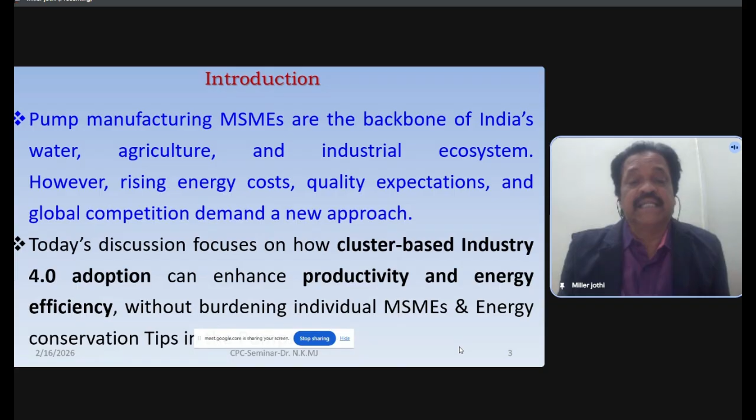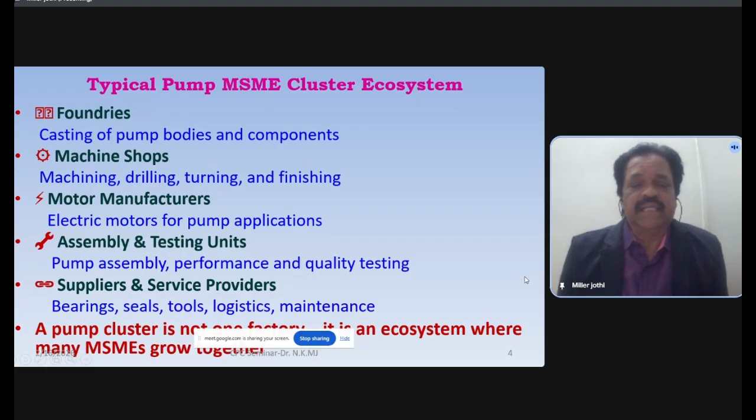So what is a typical pump MSME cluster ecosystem? It consists of five types of organizations: foundries, machine shops, motor manufacturers, assembly and testing units, and suppliers and service providers. These five units are considered as the cluster. A pump cluster is not one factory - it is many MSMEs growing together.

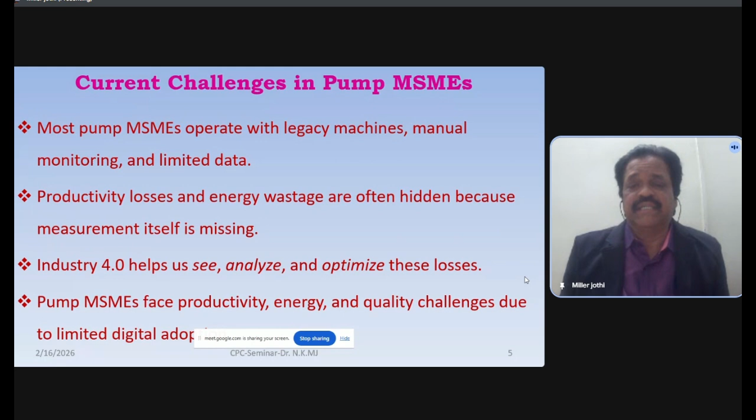What are the current challenges in pump MSMEs? Most MSMEs operate with conventional technology, manual monitoring, and limited data. Also, productivity losses occur with respect to energy wastage, often hidden because measurement itself is missing. So what is the solution? The solution is Industry 4.0 - it helps analyze and optimize these losses.

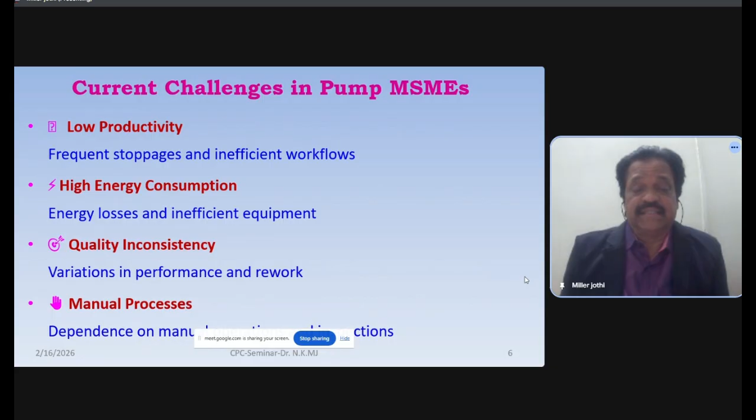What are the current challenges in pump MSMEs? Frequent stoppages and inefficient workflow lead to low productivity. Energy losses and inefficient equipment consume more energy. Quality inconsistency due to manual processes - these are the current challenges in manufacturing pumps in MSMEs.

So how do you overcome these productivity losses in pump MSMEs? They arise from quality issues, a lot of downtime, and skill limitations.

Most of the productive losses in pump MSMEs are not due to lack of effort, but due to lack of data, planning, and skilled work.

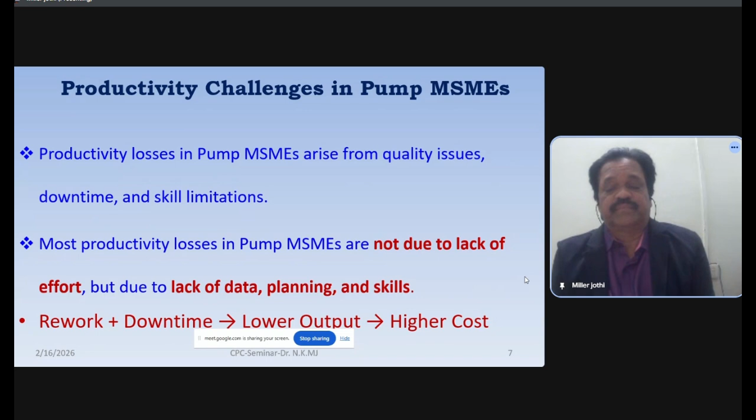What are the energy efficiency challenges in MSME during production of pumps? Energy losses in pump MSMEs occur due to inefficient equipment and lack of energy visibility. You cannot improve energy efficiency if energy is not measured. No measurement, definitely energy losses will be there, which leads to higher cost.

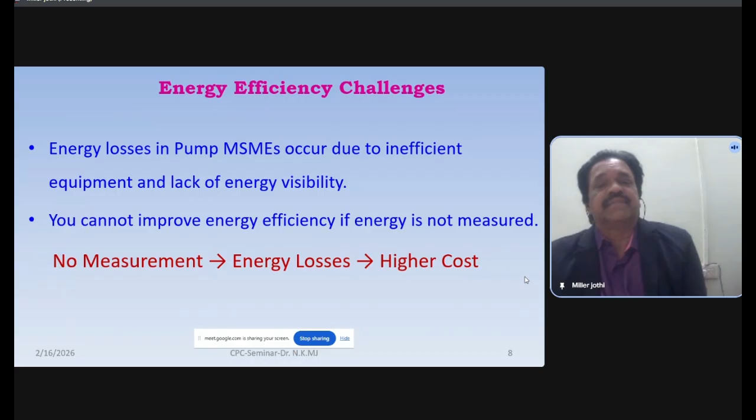So what are the current energy efficiency challenges in manufacturing in pump and MSME? High energy consumption and frequent losses by using inefficient methods. It cannot be tolerated with a poor power quality supply, which leads to voltage fluctuation and harmonics. No energy monitoring system in MSMEs means hidden energy wastage, and the data is also missing.

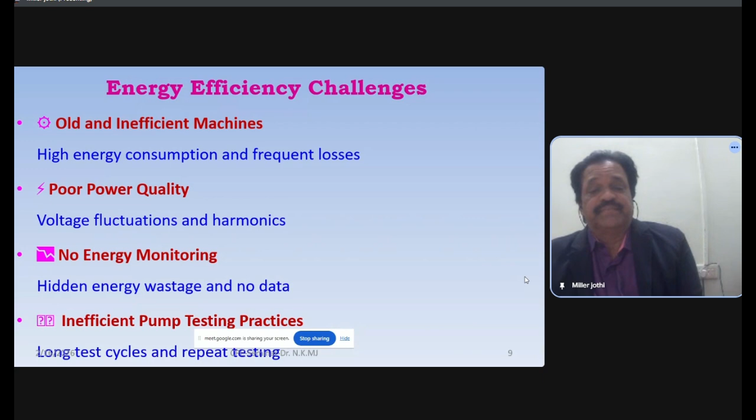So the entire solution is go for Industry 4.

Then Industry 3 revolution started until 2000. It can be done by electronics and computers, integration with electronics and computers, fully automation. At present, the 4th major challenge in industry development is Industry 4.

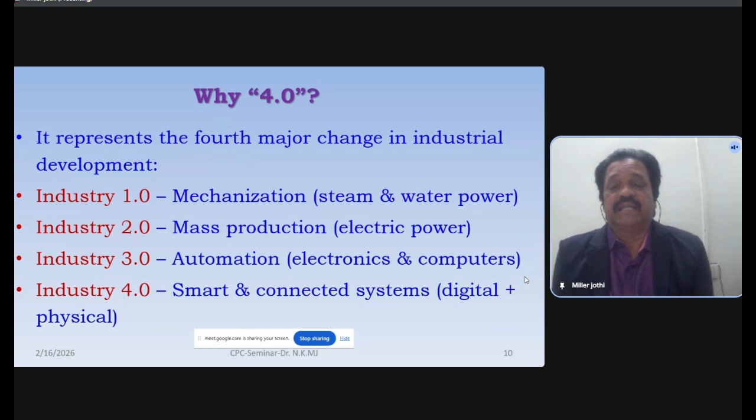Smart and connected all machines, digitalization plus physical. These are the key concepts of Industry 4.

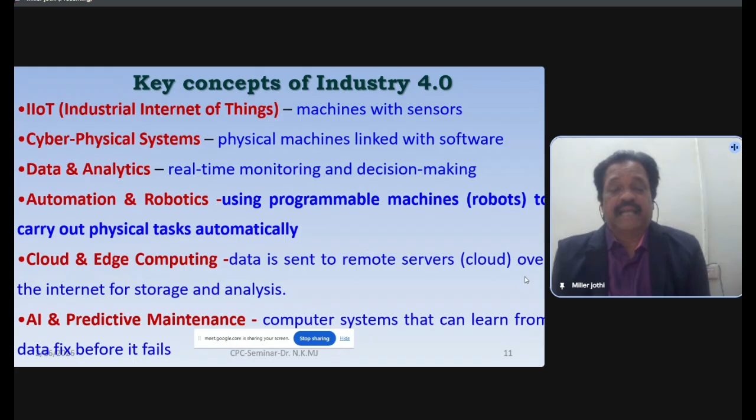Now, the question is, why Industry 4 for MSMEs? We have seen the previous slide what are the challenges and the current scenario in MSMEs. But Industry 4 helps MSME produce more product, less waste, and compete across the nation and across the globe.

Industry 4 is not about expensive robots. It's a smart one by using data. Industry 4 is mainly called the fourth industrial revolution. It's the concept of using digital technologies to make industry smarter, more efficient, and connected.

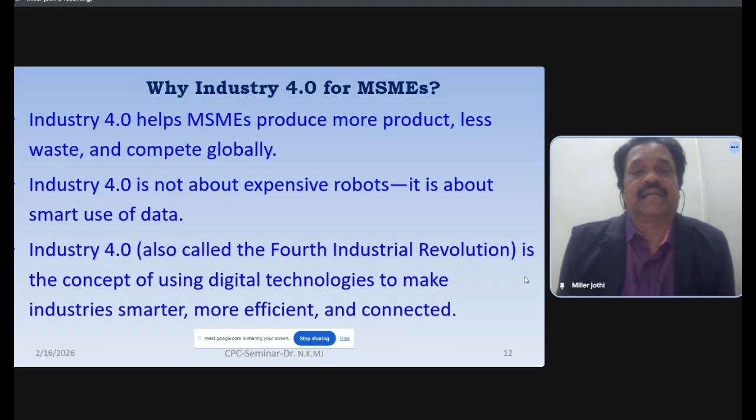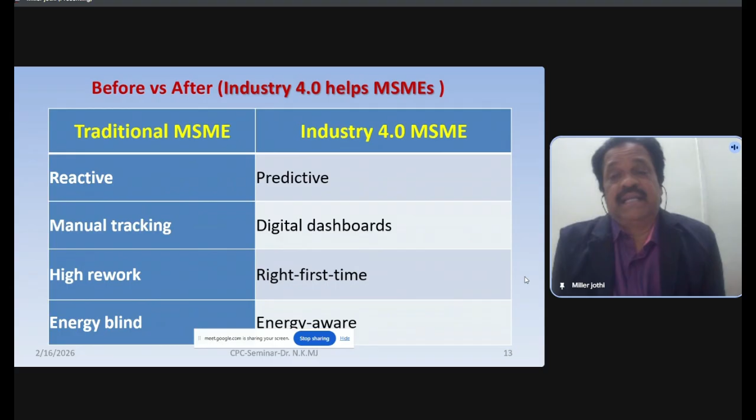So what are the applications in Industry 4? It uses digital technologies to make manufacturing smarter, faster, and more efficient. Industry 4 technologies for pump MSMEs are practical digital tools that monitor machines, energy use, and production to improve efficiency and performance.

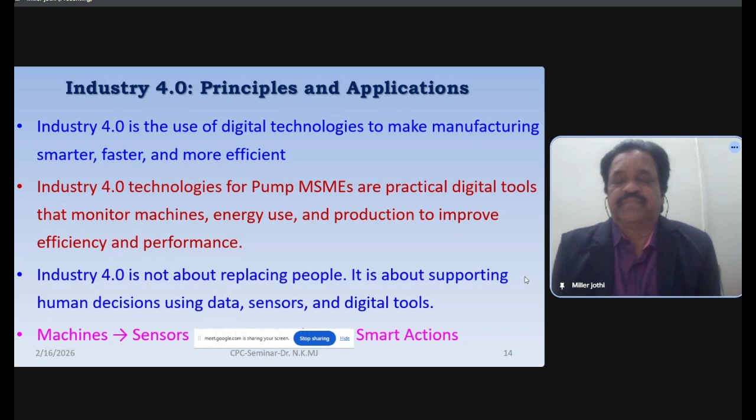One thing I wanted to tell: Industry 4 is not about replacing people. It is about supporting human decision using data, sensors, and digital tools. Industry 4 is not full automation overnight in MSME. It is a step-by-step journey, not a sudden transformation.

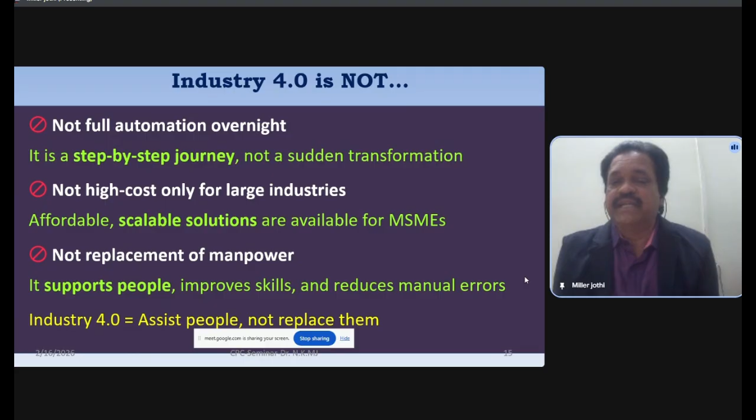Industry 4 is not a high cost for MSME. It can be an affordable, scalable solution available for MSMEs. It is not a replacement of manpower, it supports people who work with the MSME. It improves skills and reduces manual errors. So again, I am insisting Industry 4 is not replacing people, it's a smart one.

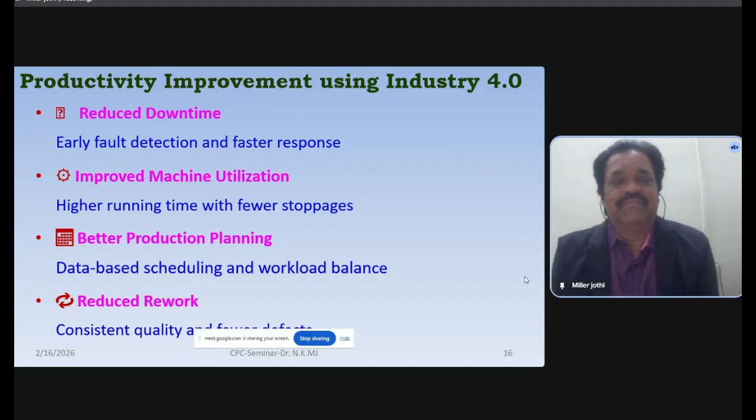What are the productivity improvements while using Industry 4? Reduced downtime, improved machine utilization, better production planning, and reduced rework. These are the main points. Due to the time restriction, we cannot discuss each and every topic earlier; only highlights we are going to discuss.

So why is it necessary? Cluster-based adoption makes Industry 4 affordable, faster, and more effective for MSMEs. Cluster converts high-cost technology into shared investment, scalable solution for MSME. One industry of MSME may hesitate to adopt Industry 4 due to cost or skill limitations. For that, the solution is cluster-based manufacturing in India. The cluster-based manufacturing allows shared investment, shared learning, and shared risk factor also. That's why cluster-based adoption is ideal for MSME.

So what is the energy efficient improvement using Industry 4? Continuous tracking of power consumption, that means real-time energy monitoring can be done by using sensors. Identification of energy loss, direct wastage, idle running time, and inefficiency that can be monitored. By using Industry 4, demand side management can also be identified and solved.

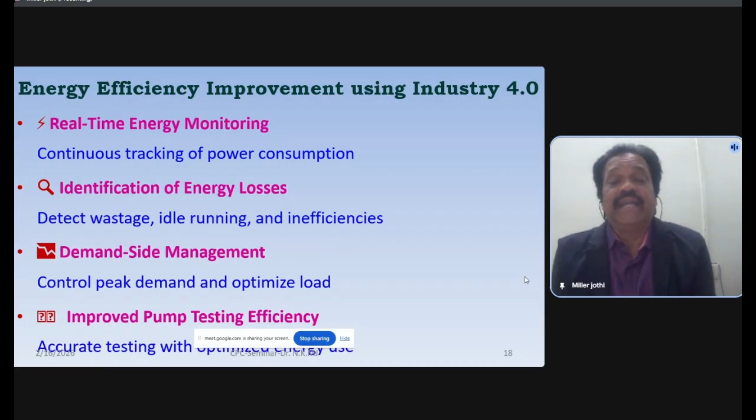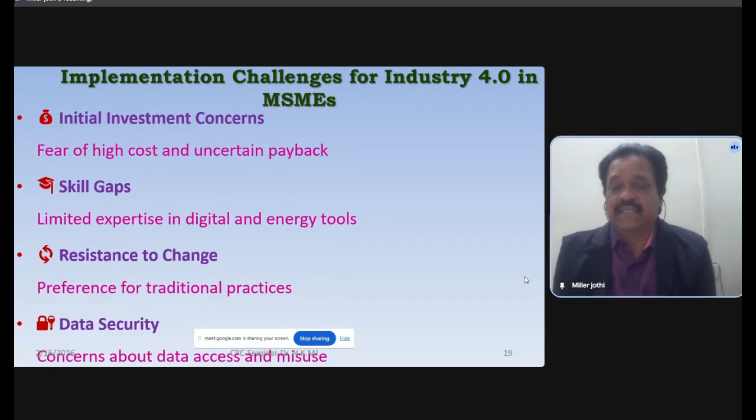Implementation challenges for Industry 4.0 in MSME. Why is it not being implemented? Initial investment concerns: each MSME fears high cost due to high investment and uncertain payback. There's still limited expertise in using digital, energy and AI tools. Most MSMEs practice traditional methods in manufacturing and haven't changed to AI technologies.

When they consider higher technology, they are concerned about data access and misuse. Clusters overcome these challenges by reducing risk through shared investment, skills and support systems, converting individual challenges into collective solutions. These challenges are common, but cluster-based adoption helps reduce risk and build confidence—this is the only solution to overcome all these challenges.

What support is obtained from government and institutions? Government support comes through MSME funding, training and technology assistance. Technology assistance can be obtained from institutes like IIT Madras Chennai. Many NITs collaborate with MSMEs to implement latest technologies like artificial intelligence. Effective collaboration between government, industry and academia accelerates Industry 4.0 adoption.

Second phase: we will discuss energy efficiency measures in pumping systems. How do we find the possibilities of energy measures in pumping systems? This is completely technical, but I hope all engineers can follow, and even non-technical people can follow this seminar.

Statistical analysis shows pumps account for 15% share of national electricity consumption. 40% of electricity used in the industrial sector comes from pumps. 100% of electricity consumption in agriculture is from pumps. This is the statistical analysis.

What is the scope in pumping systems? What would be the savings? What is the benchmark? Minimum 30% of savings can be directly obtained from the pump if appropriate measures are implemented.

How? Generally, the pump's initial cost is around 3.2% only. During operation, the maintenance cost is 1.3%. But the energy cost during the lifetime period is 95.5%. Let me give a small example: a small pump with 7.5 kilowatt capacity has an energy cost of 15 lakhs.

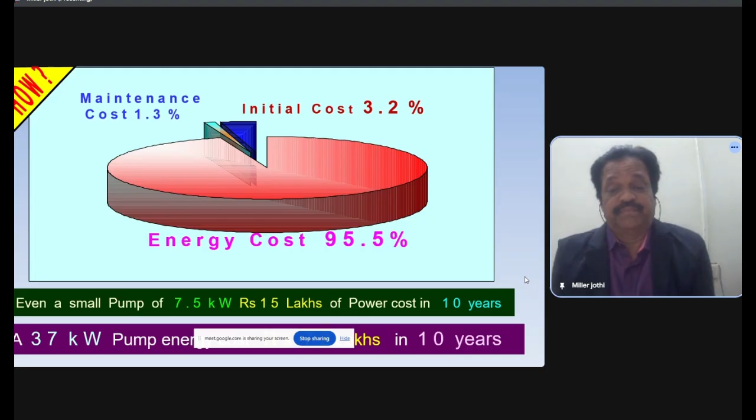In about 10 years. If you go for a higher capacity, a 37 kilowatt pump, if working for 10 years, the energy cost is around 37 lakhs.

Now this is the main important technical data in the pumping system. The left hand side shows a well-designed pumping system, the right hand side shows an actual pumping system. In the well-designed system, the motor efficiency is 90%. We give 100% energy to the motor, with of course 10% losses, so 90% goes as pump input.

When the pump is considered at 85% efficiency, there are 13.5% pump losses, so the pump output will be 76.5%. This 76.5% pump output, accounting for valve losses of about 15.3% and 12.2% losses in piping from leakages and flanges, finally results in useful energy of 49%. So in the well-designed system, 100% energy is reduced to 49%.

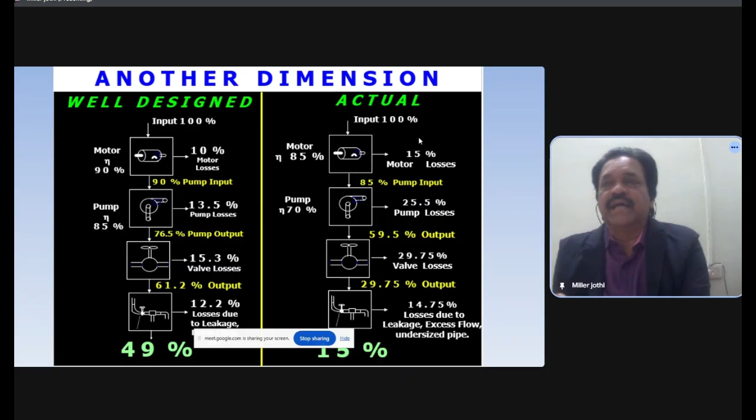Considering valve losses of about 30% and leakage losses about 15%, finally the conventional motor's 100% energy is reduced to only 15%. So we need to be very careful about how to save energy in the conventional pumping system.

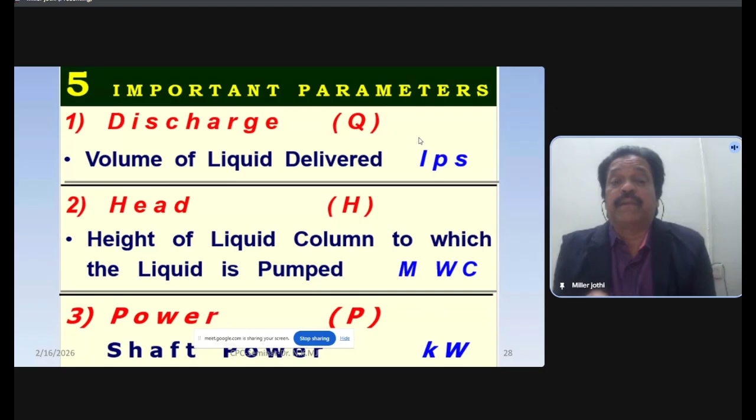Before that, we need to understand the basics of the pump—it's very important to study the basics. There are 5 important parameters: volume of liquid delivered, called discharge, in liters per second; head, in meters of water column; shaft power, the power given to the pump shaft in terms of kilowatt; efficiency of a pump, the ratio of power imparted on the fluid to power given to the pump shaft; and specific speed.

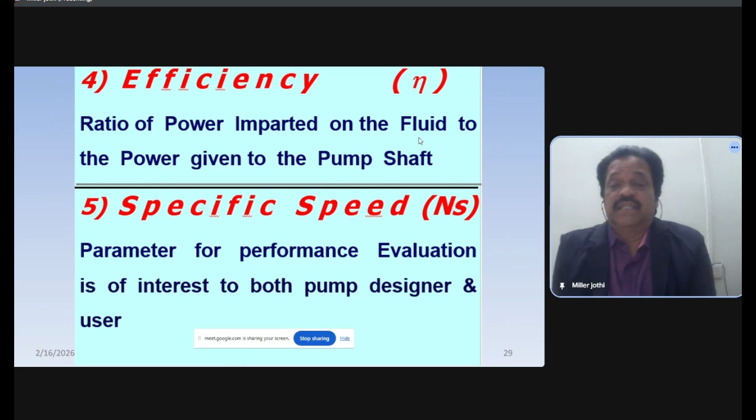Now we need to understand the basic law of pump. Without analyzing the basic law and concepts, we cannot go for measuring energy conservation. That's why I'm going to give a brief introduction about the basics.

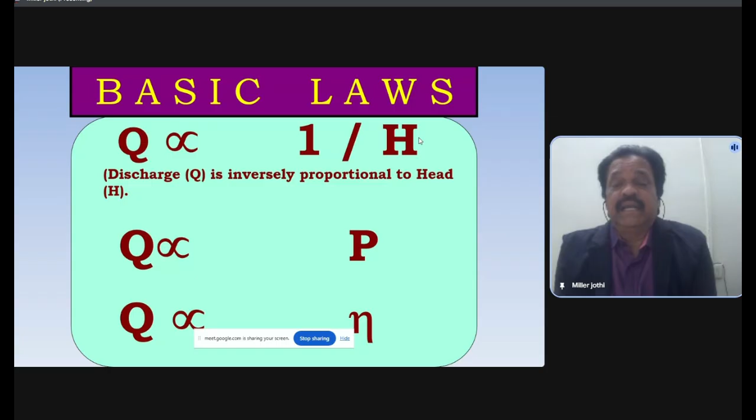The discharge, that means the volume of fluid discharged from the pump, is inversely proportional to the head. When the discharge increases, the head decreases due to the pressure. The discharge, the volume of fluid delivered, is directly proportional to the power. Similarly, discharge is directly proportional to efficiency.

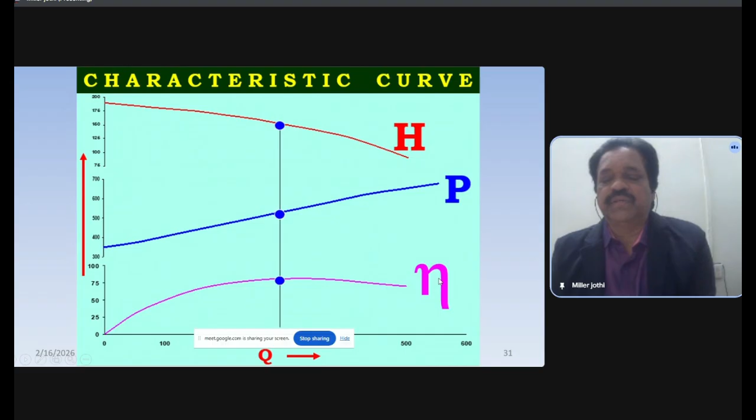You can see the graphical representation. X-axis is discharge, and the head is such that when the discharge increases, the head gradually decreases. When the discharge increases, power increases gradually. Similarly, efficiency also increases.

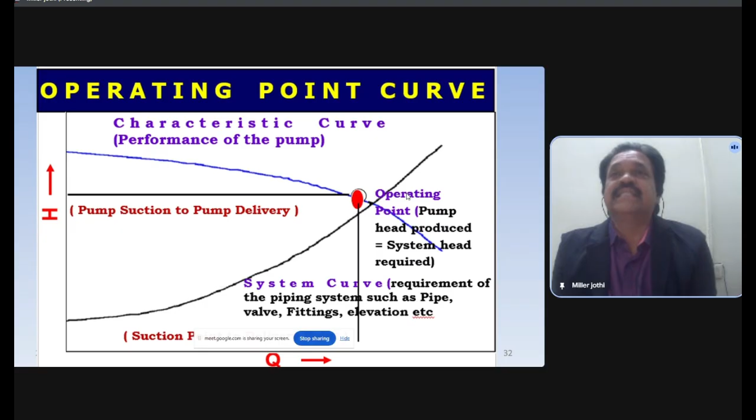So please understand, the blue curve is the characteristic curve, and the thick dark line in the upward direction is the system curve. This is the pump's generic graph. Now we are going to discuss the possibilities of energy savings in pumps.

First, we need to understand the reasons for excess power consumption and energy leakage. Many industries are making the wrong selection of pump. They are not selecting the exact capacity of pump. They just borrow one, and finally they are confused why energy consumption is high because of the wrong selection of pump.

Over design, over capacity, improper layout of the pump - many industries have used pumps for 20 to 30 years and still use them as old, inefficient pumps. Multiple smaller size pumps are used by many industries. These are the main reasons for excess power consumption.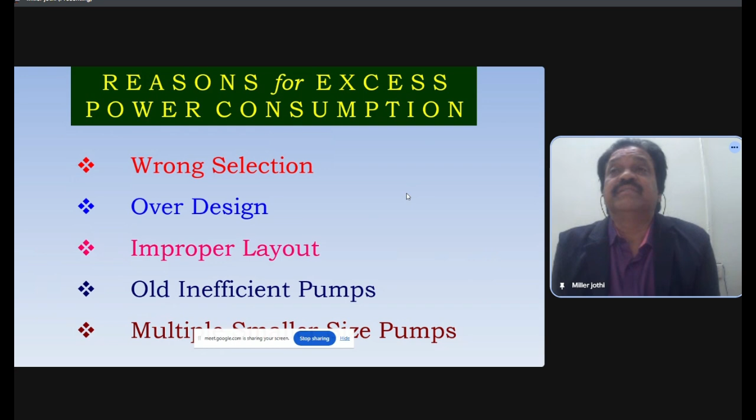So how to sort this out? What would be the rectifications? First, select the correct size of pump. We have to identify how much head is required, how much distance or height we want to pump the liquid, and what flow is required for the process.

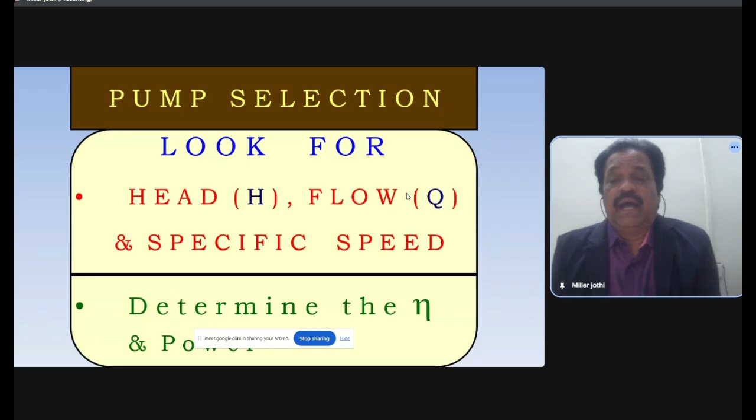What are the specifics? This will be useful to determine the power and the efficiency. Right, coming to the head and discharge selection.

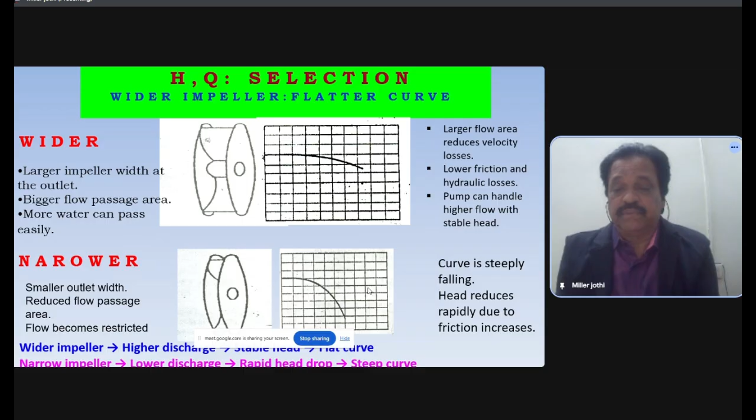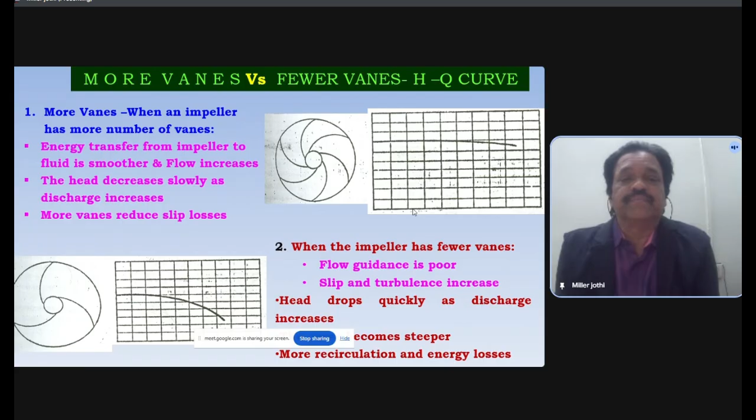Depending upon the requirements, manufacturers can go for more vanes or fewer vanes.

Coming to the energy efficiency motor, the pump always needs to connect the shaft with respect to the motor. Many MSMEs manufacture standard motors, but from the energy conservation point of view, the pump should be connected with an energy efficient motor, at least IE1. IE1, IE2, IE3, IE4 - so many ratings are there. At least energy efficiency motor rating 1 should be mounted.

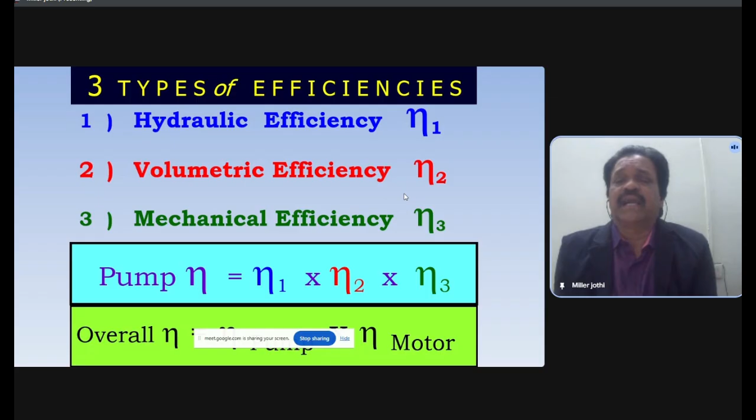Now, what are the three types of efficiencies in the pumping system? Hydraulic efficiency, volumetric efficiency, mechanical efficiency are to be considered as pump efficiency. When we add motor efficiency, we can calculate the overall efficiency of the pump.

What are the losses? How do you estimate the losses? How to save energy by minimizing the losses?

First is hydraulic losses. There are diffusion losses, where in the diffuser the kinetic energy of the fluid is converted to pressure energy. And there are losses in the casing, losses in the impeller, losses due to friction. It amounts to 15 to 20%.

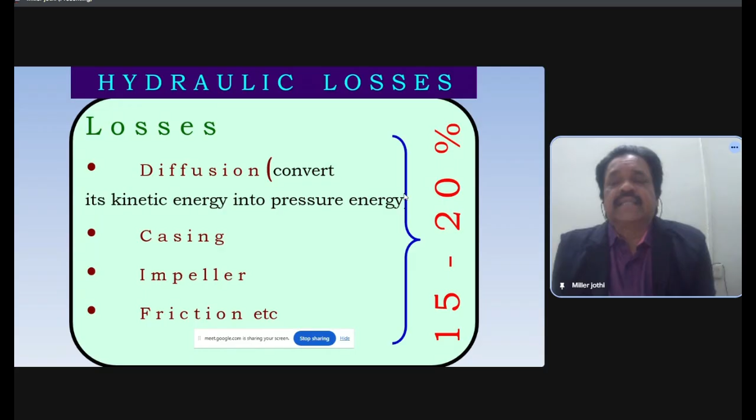Volumetric losses will be there too. Due to leakage losses, the volumetric losses is limited, accounting to 3 to 5%.

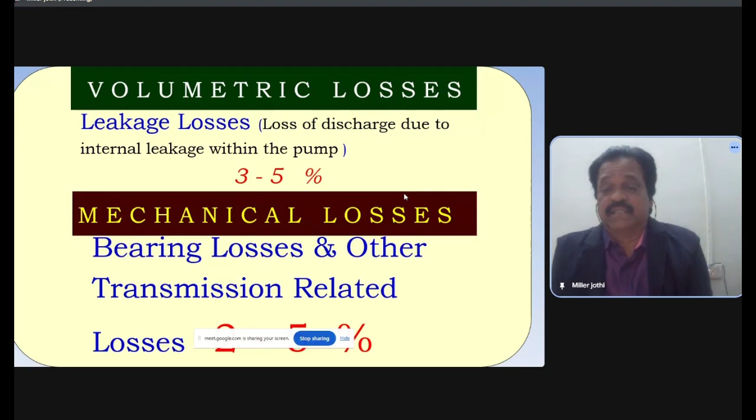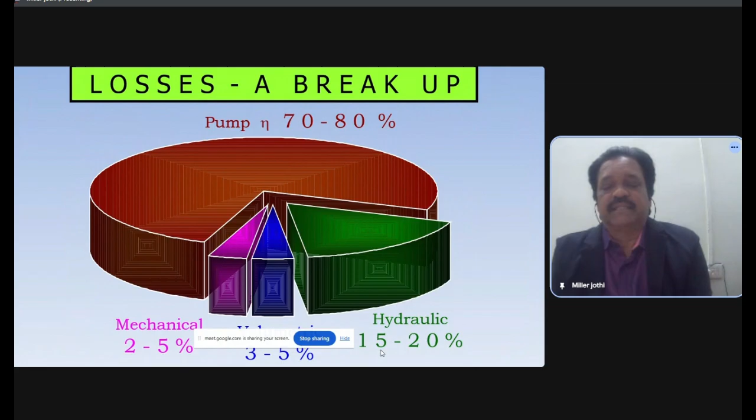Of course mechanical losses will be there too, leading to bearing losses and other transmission losses. When represented in a pie chart, mechanical losses is 2 to 5%, hydraulic losses 15 to 20%, and volumetric losses is 3 to 5%. So the overall pumping efficiency is only 70 to 80%.

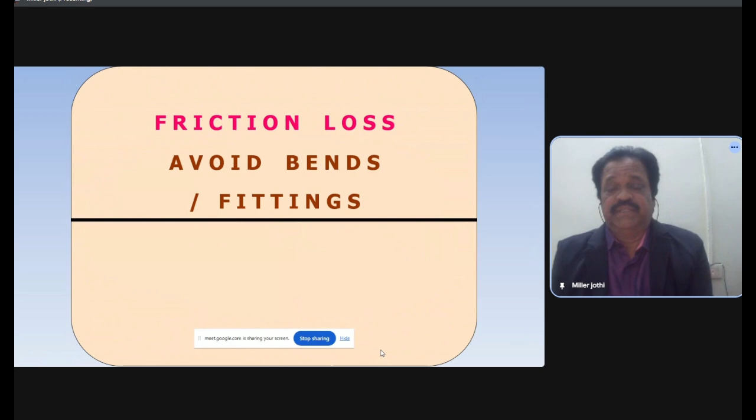How to minimize the friction losses? Avoid using bends and excessive number of fittings. Friction loss is directly proportional to the velocity squared. The solution to minimize friction loss is to identify a higher pipe size, which leads to lesser friction loss.

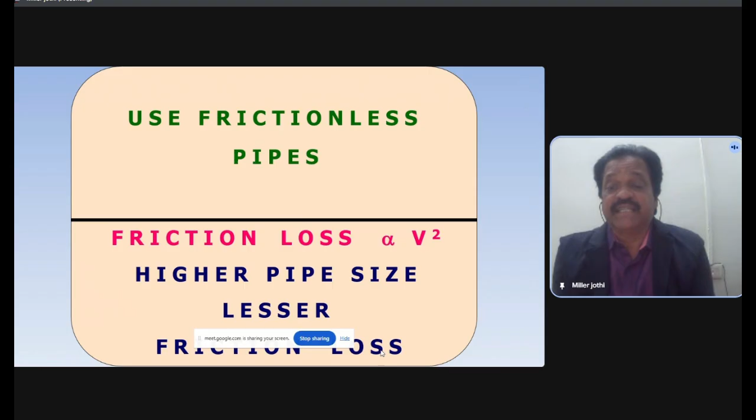You can see this graphical representation. I am selecting 100 mm diameter pipe, 80 mm diameter pipe, and 60 mm diameter pipe with respect to head loss. When we go for 100 mm diameter, the friction loss is very minimal. Gradually, as the diameter decreases to 80 mm and 60 mm, the head losses slowly increase. So a higher size of pipe normally reduces the friction loss, and a smaller size of pipe increases the friction loss.

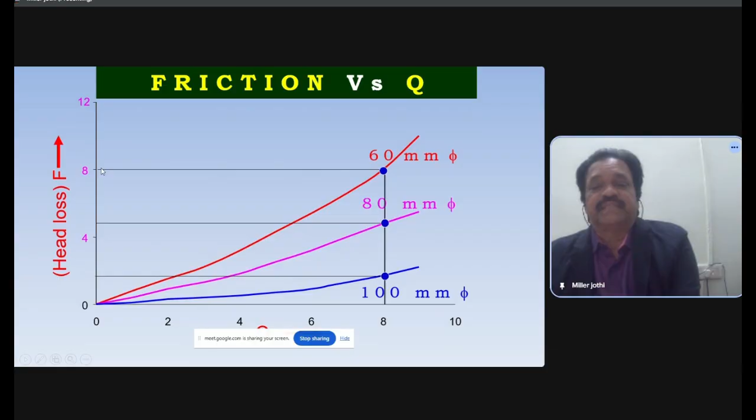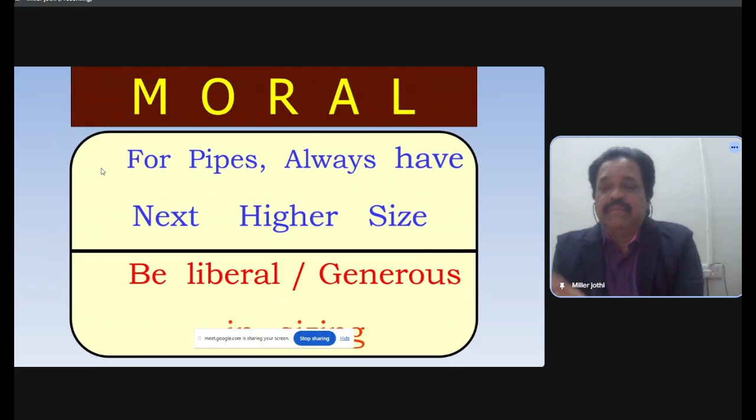So I can give a case study. The good lesson is to always select the pipe in the next highest size. While selecting the pipe, be liberal, be generous. This will be the case study for the friction losses.

For example, a pipe life is 25 years. Considering amortization is 4%, interest is 10%, maintenance is 2%, the pipe operation cost amounts to 16%.

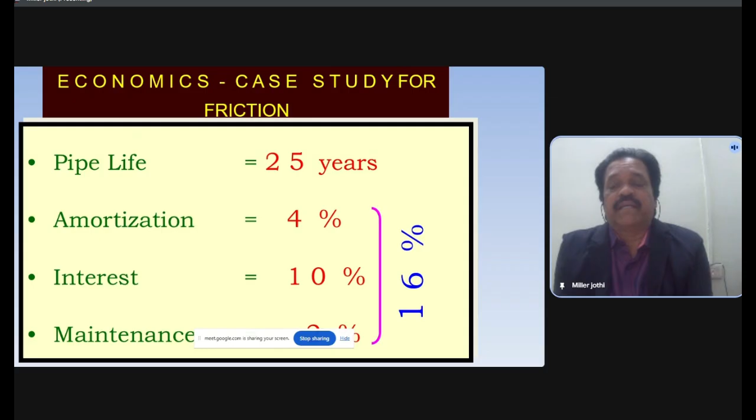Now coming to this table, I am taking 80 mm diameter, 100 mm diameter, and 150 mm diameter pipe sizes. The pipe cost is given as 60,000, 95,000, and 1 lakh 30,000 respectively. The operating cost is 16% as calculated in the previous slide, which comes to around this much.

When we consider the friction cost, the 80 mm diameter pipe friction cost is around 47, and the 100 mm diameter pipe friction cost is 16 and 6. This is directly related to the power cost - the friction cost is directly related to power cost, so the power cost will be this much, converting the unit consumption into rupees.

Assume the unit cost is rupees 8 per unit. So in column 4, adding the operation cost and power cost together, the total cost is 5.1 lakhs for 80 mm diameter. For 100 mm diameter, the operation cost is 1.9 lakh. For 150 mm diameter, the operation cost is 0.8 lakh.

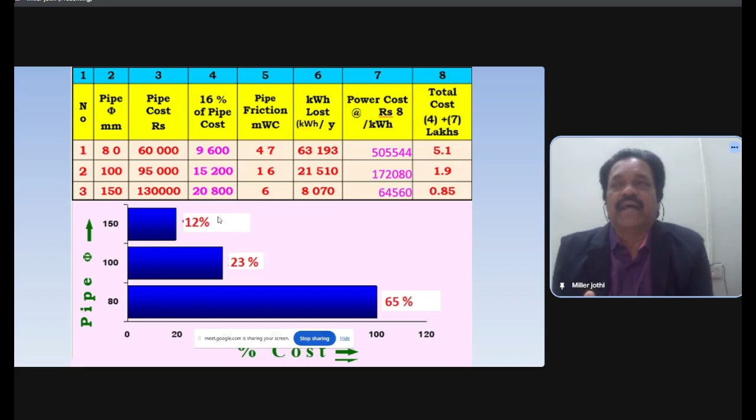So what would be the options for flow control? There is control via valve method, throttling method, on-off mode type, and variable frequency type. These are the methods being implemented for controlling flow.

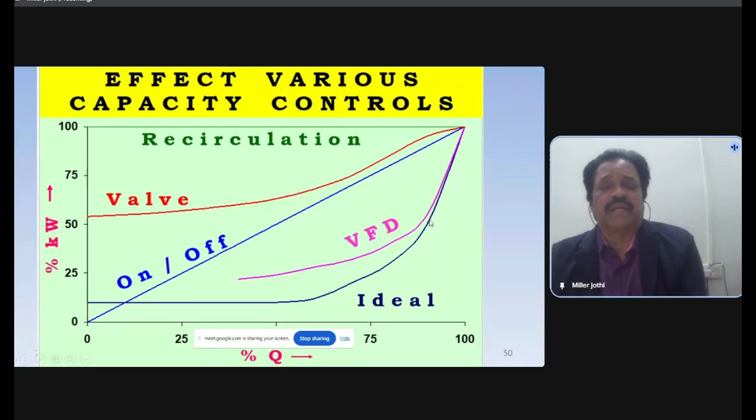Is it a good case? Is it a good scenario? No. When pump delivers a lesser discharge and a higher head, it leads to inefficiency and the pump becomes unsafe. So always the pump should be operated at the optimal point.

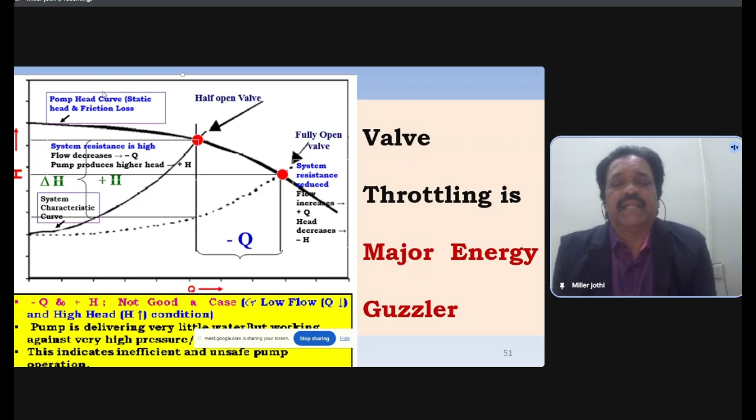So I want to show this as a case study. While selecting the pump, the capacity should be right. For example, the capacity of the pump is 85 liters per second, but the process requires only 55 liters per second. So in order to get 55 liters per second, I am closing the valve to 60% open.

When I am calculating, the power will be 37 kilowatt. Now I am going to open it fully.

That means when I am selecting the exact correct capacity of pump, where the process requires 55 liters per second, the valve is fully open now, so I am delivering 55 liters per second to the process. The power consumption would be 23. So what would be the savings?

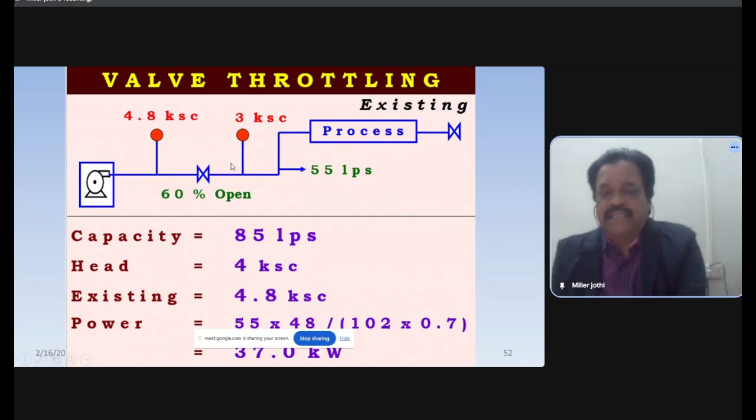With valve throttling, that means 60%, 40% closed, the energy consumption is 37 kilowatt. When I am selecting the correct size of pump, that means 100% open, the savings would be 14 kilowatt. So directly we are getting savings when we select the appropriate pump size.

So many industries select a higher capacity of pump than needed. So what shall we do? What is the option to correct for having a higher size of pump? Impeller trimming.

The first option is impeller trimming. The diameter of the impeller can be trimmed about a maximum of 15%, 10 to 15% of the diameter.

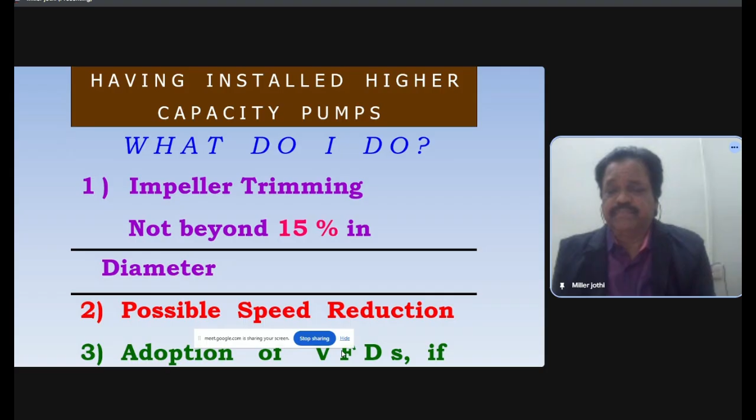This can also be reduced through speed reduction by adoption of VFD. But before speed reduction, we need to understand the relationship of laws with respect to speed.

Discharge is proportional to the speed, head is proportional to the square of speed, power is proportional to the cube of speed. With respect to impeller, discharge is proportional to diameter squared, head is proportional to the cube of diameter, power is proportional to diameter to the power of 4.

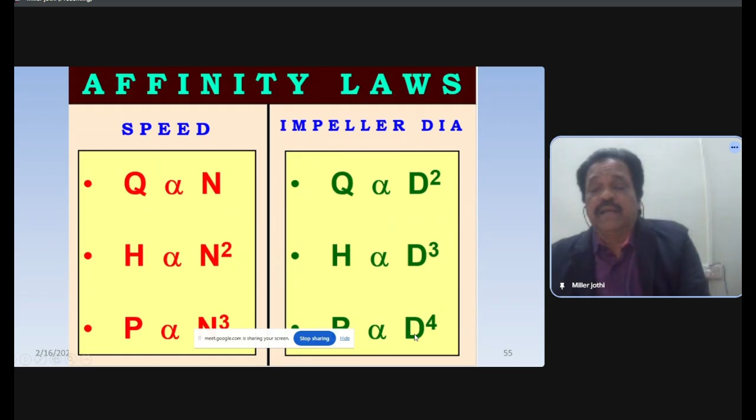Now you can see the impeller trimming concept. This one, as I told you, is the pump characteristic curve. This one is the system curve.

Initially, before trimming, this is the pump characteristic curve where this point originally served as the operation point. When I am trimming about 10 to 15%, after trimming this curve will shift to this point, so the operating point is reduced to this point.

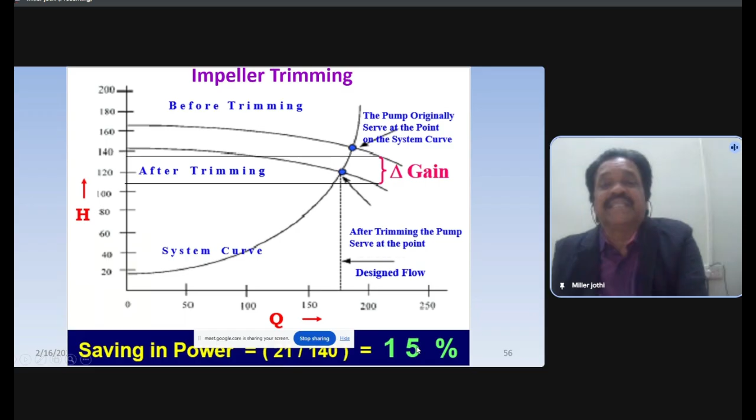Now we can see the difference. Discharge-wise it is reduced, and head-wise it is reduced. So when we calculate the power, directly 15% can be saved. This is the concept of impeller trimming.

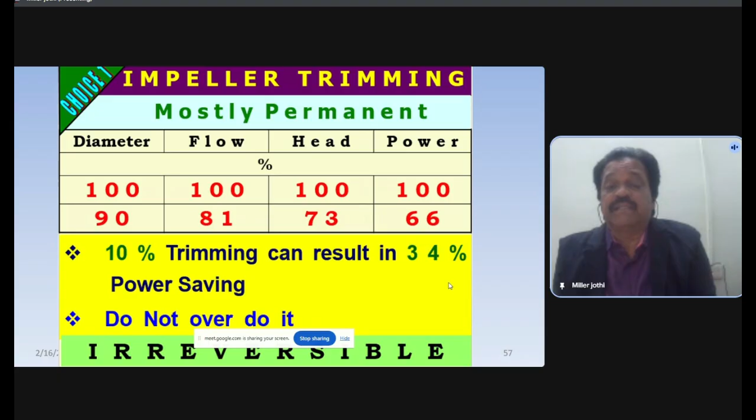See here, diameter is 100%, flow is 100%, head is 100%, everything is 100%. When I reduce to 10% trimming of the impeller diameter, the flow is 81%, head is 73%, power is 66%. So it is easy to understand from this slide that 10% trimming can result in 34% direct savings. So we should not trim beyond 15%, otherwise it will be overtrimmed.

So for speed reduction, similarly, speed is directly proportional to flow. When I decrease the speed to 90%, the flow is reduced to 90%, head also reduced to 81%, power is 73%.

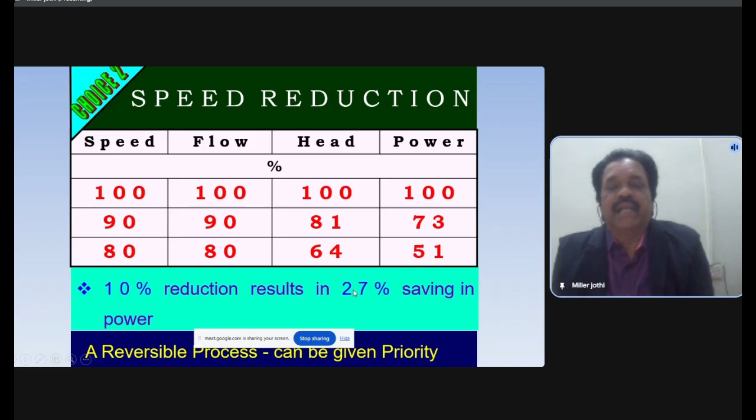If I further reduce to 80% speed, flow is 80%, head is 64%, power is reduced to 51%. So you can see from this tabular column, 10% reduction results in almost 27% savings. We will reduce the speed.

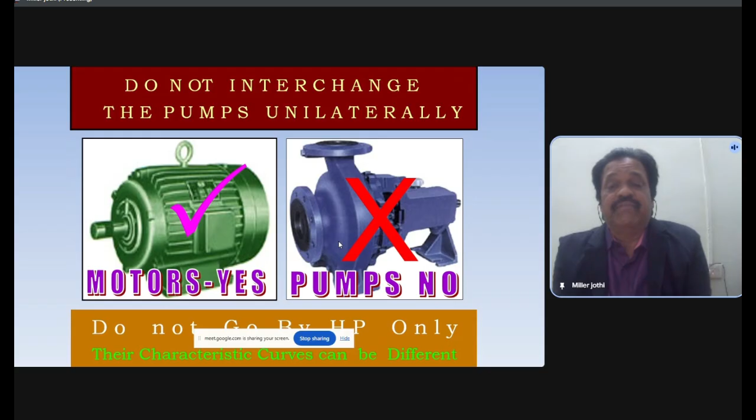Because the pump characteristic curve can be different. Of course, if any motor is found to have error or failure, we can interchange it because same HP rating, same speed, same voltage motors can be interchanged since motor performance characteristics are standardized, whereas pumps are not. Each and every pump has different characteristic curves, different efficiency curves, and different net positive suction head requirements.

That's why if any pump fails, do not replace it with another and execute operations. This is the one.

Coming to leakage. Leakage leads to not only water losses, but also electricity losses. Everyone thinks only water is leaking with some measurable amount, but everyone ignores what will be the electricity loss. So what is the solution?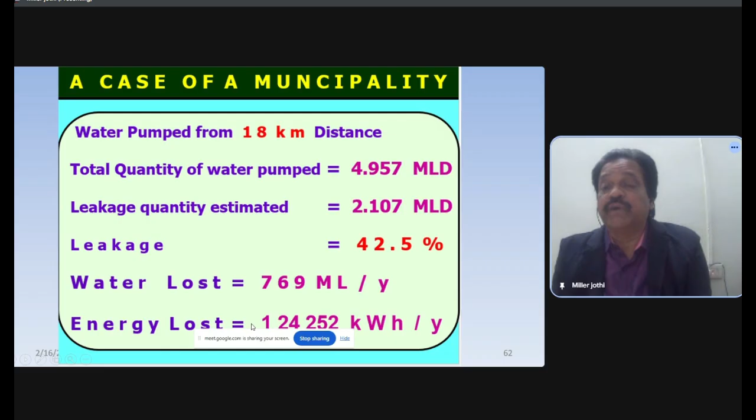So what would be the energy lost? As I pointed out before, not only the water leakage quantification, we need to consider the loss of electricity also. Here, the energy loss is around 1.2 lakhs kilowatt hour per year. So this is very important.

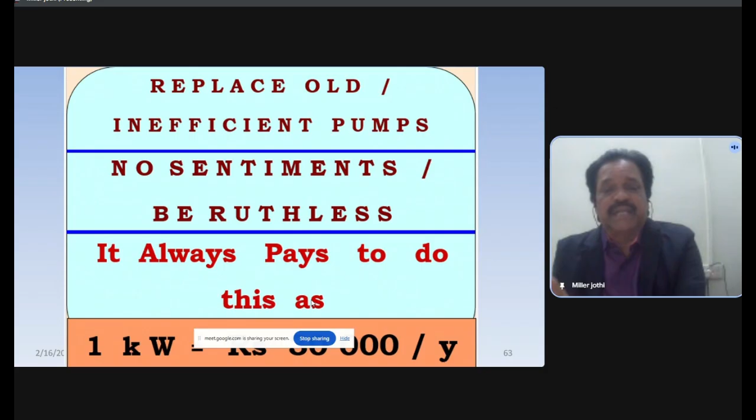Of course, any inefficient pumps in the plant, you need to replace immediately, no sentiments. So finally, I'm coming to the small information about subsidy for promotion of energy audit and conservation of energy under the PEACE. The Tamil Nadu government provides reimbursement for energy audit consultancy to MSME through promotion of energy audit and conservation of energy.

There is a GO number 36 announcement made for a special scheme to promote energy efficiency in MSME. So what are the objectives of this scheme? Promote energy efficiency awareness, encourage certified energy audits, support MSME financially, reduce energy intensity and carbon footprint, improve productivity through energy savings.

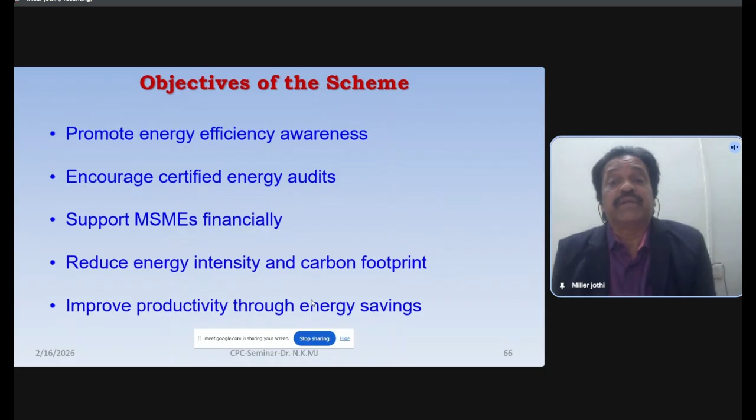So what are the reimbursements? The subsidy details: 75% of the cost of the energy audit fee can be reimbursed, that means maximum subject to a ceiling of 1 lakh per unit.

What are the additional incentives? In case the particular industry has done an energy audit, the energy auditor gives proposals. So based on the implementation of the energy auditor's proposal, for example at least 10 to 15% energy savings shown by evidence, you can get 50% of the cost for replacement of machinery and equipment. Maximum 10 lakhs rupees you will get for this subsidy. This is a very interesting scheme.